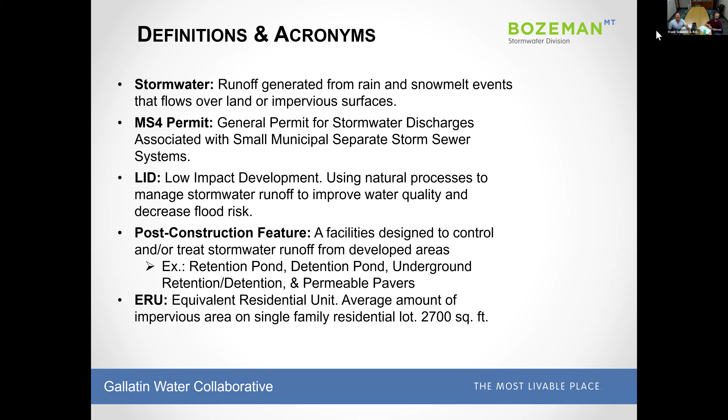So moving on, a little bit about stormwater here in Bozeman. This group, you've heard me say it many times: we discharge our stormwater directly into creeks and lakes and ponds around town. Stormwater's not going to a treatment plant before it discharges.

One of our big program drivers is we're here to improve waterway health. And we also need to protect public safety from flooding as well as from stormwater induced water quality events. That photo here really shows that. That's on Bozeman Creek, just after a little 1/10 of an inch rainstorm, so you can really see the plume discharging into the creek.

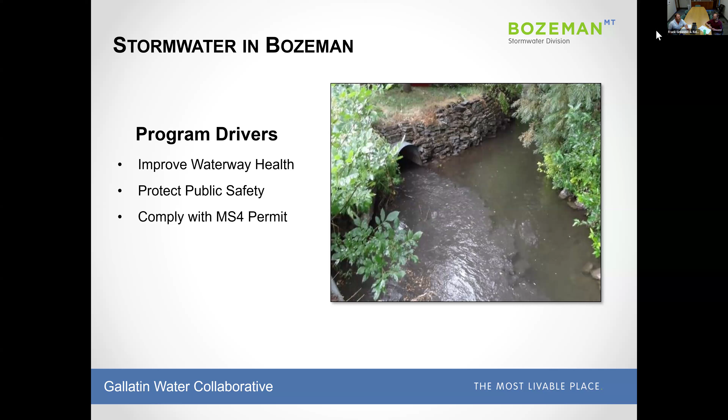Finally, we are required by law to comply with our stormwater MS4 discharge permit. In order to accomplish all these things, it does take money, so I will let Adam explain to you how we get our money and how we spend our money.

Thanks. So yeah, everybody is affected by stormwater. Rain hits everything, of course. We're all using the public streets, but then there are bigger contributors to runoff, hence the charge being based on the amount of impervious areas that you have.

So it's actually split into two charges. If you get a water bill, if you have a water meter in the city of Bozeman, you'll see this on your bill. There's a flat charge that everybody gets, just this one amount, $4.53 per meter. And then the variable charge is the one that's based on the amount of impervious area.

The next slide will show what it actually goes to, but the idea is that there are credits for properties that have stormwater features, post-construction features that Frank was talking about in the definition slide. Those actually qualify properties for a credit because they are already providing some storage and water quality treatment on their site before it ever gets to the city's stormwater system or to receiving waters. It's not that complicated of a calculation—it's basically a 45% credit on that variable charge is the way that it's set up right now.

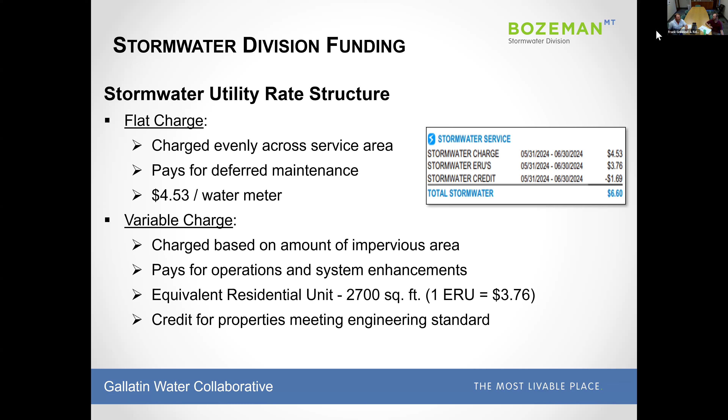So one single house, we don't try to nitpick whether you have a little bit bigger house or a little bit smaller house than somebody else. If you're a single family house, you just get billed one, and then everything larger than that is in multiples. So if you have a business with a really big parking lot, you might have 25 or 30 ERUs.

So what does that go towards? That's our sole source of funds is ratepayers.

That goes toward deferred maintenance, for instance fixing 130-year-old pipes. We've still got a lot of those left in the ground, and we're lucky to have gotten that long a lifespan out of them, so we need to start replacing them a little quicker. There are other system upgrades as well as cleaning and equipment to accomplish all that. That's around $650,000 a year.

Our utility operations, which is just keeping up with cleaning those catch basins and pipes, as well as the contracted services we need to make the bills go out and the lights stay on, and pencils and boring administrative things, but they all add up, and those are around $800,000 a year.

And then approximately $250,000 per year, although this one really varies a lot by what project we might have approved that year, are system enhancements such as flood control and water quality improvement projects. I would say we're actually probably a little higher than that right now. I think what we've picked up through growth and inflation over the last couple of years has probably gone more into that category.

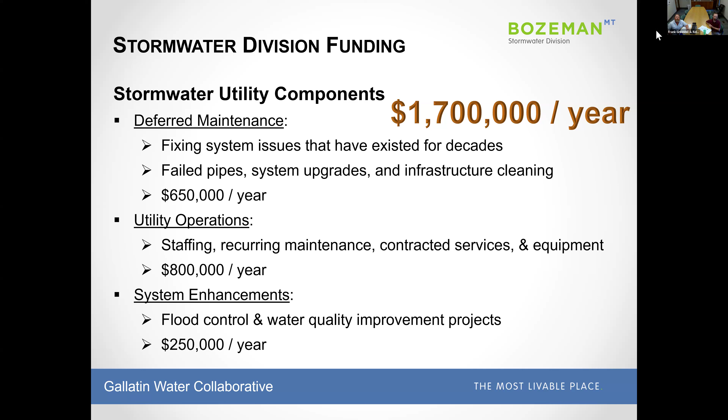So I guess, 1.7 million as far as utility goes, isn't that much money, but it's still a big chunk of change. And we need to spend that money as efficiently as possible.

Since 2008, the division has been operating under a 2008 stormwater facilities plan. That plan primarily addressed, or the main thing out of that 2008 plan was, you guys need to develop and implement a stormwater program. And we've done that now. We've got a program. We've accomplished a lot of the actual individual projects that were included in that plan. So that 2008 facilities plan has run its course for the most part.

So we are now working on this 2025 plan. The goals of that plan are really, a big one is to update our post-construction policies.

We're hoping to get out of this a big menu of capital improvement investments. And with that big menu of projects that we can do, be it pipe projects or water quality or hybrid type projects, we'll be able to better collaborate with other city projects. So other cities will know our long-term plan, and if they're going to reconstruct a street somewhere in like 8 years, we can better align stormwater needs with street reconstruction projects or a water main replacement.

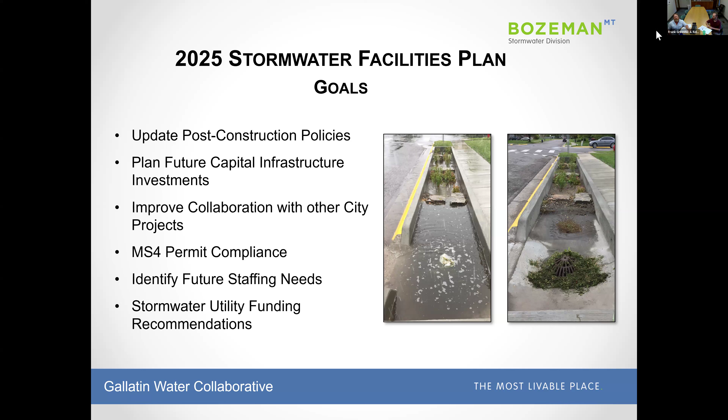So really one of the ways to accomplish the goals of this facilities plan, one of the first ones too is, we want to align with currently adopted plans here in the city. That consistency is very important to us. And to start, 2 of the main plans are the Bozeman Community Plan, as well as the Climate Action Plan. And I believe this group is pretty familiar with those.

I believe there were probably formal comments, I know for at least the Climate Action Plan submitted by this group, but in both those plans, resiliency is a major theme. So those plans each have, I'll just take the community plan, for example.

R1 is pretty much a goal in the plan to continue to strengthen and develop resilience. And in that goal, there are specific action items called out that we would love input on, that could potentially be incorporated into the capital planning section of the stormwater facilities plan update.

So for a little bit of homework, to make a strong way to provide comment on this plan, it's good to base input on these already established plans. So maybe some homework for the group is going through these plans - what do you like about them as it relates to the stormwater facilities plan update? That's a great basis for public input.

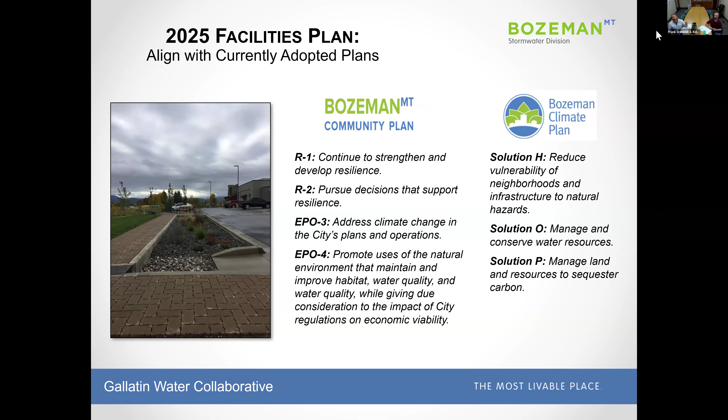So the Bozeman Community Plan and Bozeman Climate Plan are 2 plans good to be familiar with when thinking about providing input. A couple other ones would be the Bozeman Creek Enhancement Plan - looking at this one, we've accomplished a lot in here - and then the Parks, Recreation, and Active Transportation Plan.

There might be some other plans that could be germane to this, but these are the 4 that really stuck out to me. So again, researching these plans, and if anybody has trouble finding them, feel free to shoot me an email and I can dig them up for you and send them to you.

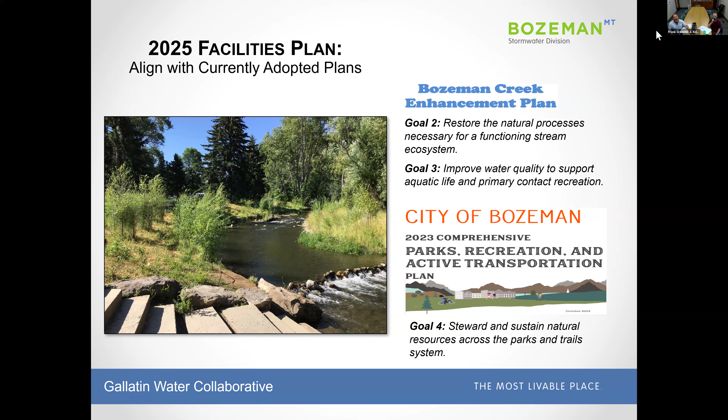Resiliency is kind of a theme in these 2, but not near as much as the first 2 plans. But really the Bozeman Creek Plan - improve water quality and support aquatic life and primary contact recreation - that's a really big one for us, and we're doing that every day. So aligning with currently adopted plans is a big thing we're trying to accomplish with our facilities plan update.

Some work that we have already done on this facilities plan update is - for our post-construction program, again, post-construction is how we're managing stormwater runoff from these developed areas.

So we have interviewed other cities - Kalispell for one, Kirkland Washington, I think Redmond Oregon, Bend Oregon - and we interviewed them on a suite of things, from policy to division structure, just about their programs as a whole, to figure out what other programs are doing.

Programs that are more advanced than us that have worked through this post-construction portion of stormwater already. Our consultant DOWL also reviewed our current post-construction program by looking at our existing policies, ordinances, some of our inspection documents, etc., just to see what we're currently doing and what we're currently not doing. And DOWL also went out and did a condition assessment of a subset of our existing post-construction facilities in town.

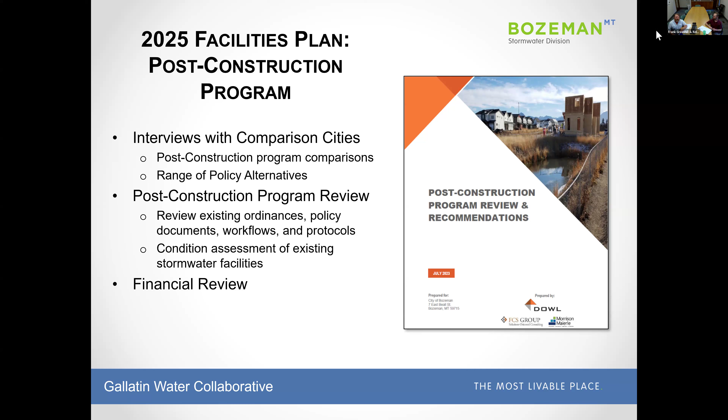So finally, they did a financial review of our program, and to get caught up on the maintenance - just to get our post-construction facilities up to an as-designed, functioning level - we're looking at about an $18 million maintenance bill. That's just to get caught up. So not a small task ahead.

They gave us a little summary from it. We do have clear inspection and maintenance policy. Our design criteria for these is currently getting updated in our design standards updates. So the design of facilities - the sizing, the volume requirements - all that is not being addressed here. None of the engineering portion is being addressed in this. That's all in our engineering design standards update, which is open for formal public comment for about another week.

The big one they're telling us is our current inspection program is lacking because, like Lily pointed out, there are so many of these. We are currently inspecting about 100 - the city owns about 100 of them. The privately owned ones are over 1,000, and we think that there's probably 600 unknown ones as well.

And they're probably all private, yeah, and we just don't have modern records on them. So anywhere from 1,000 to 1,600 privately owned facilities are not being inspected and maintained, or at least a good portion of those.

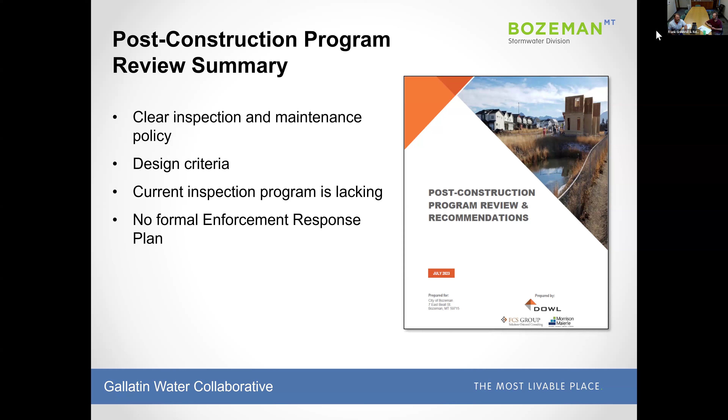Finally, one of the big ones from the summary is we do not have a formal enforcement response plan. We knew that going into this, not only because we knew it, but DEQ told us that in a violation letter we received from them, and our consultant told us that too. This is a big piece where you guys can provide input on helping us develop that formal enforcement response plan. So that is one of the recommendations, we need a formal enforcement response plan.

The big recommendation out of this post-construction program review, though, is we should focus city efforts and city resources on inspecting only the city-owned facilities. Trying to do all the other ones would be too much for us. That's just a recommendation, and so helping us develop a program for getting those privately owned facilities inspected and maintained.

How we do that, Adam, you could provide some insight on that maybe for what you heard from the post-construction interviews. Would you want to go into that? Yeah, I think maybe just a couple of examples of what's out there, what are possibilities.

There are these other cities, some have different geology and different layouts and different development patterns, but the themes were who's responsible for what and how do they have to be designed. We took their design feedback and that went into the engineering design standards process. But the ownership and maintenance piece was really interesting. Most of them had a similar layout to Bozeman, where certain features in the public right of way are maintained by the city, and if it's on a private lot, those owners maintain them.

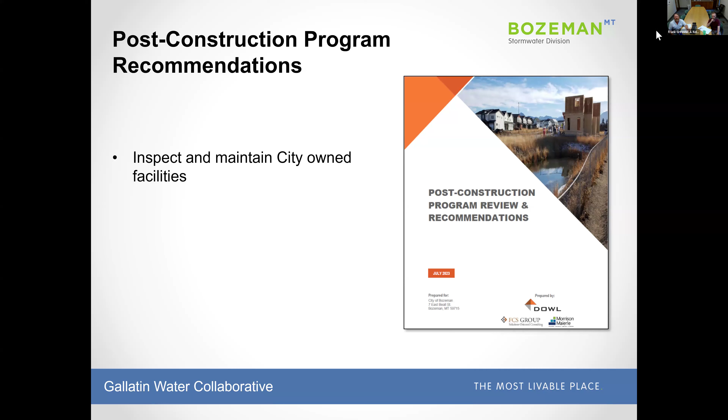And so, yeah, that's about it for post-construction. It's a really big part of the program. So just remaining work where we're really looking for input from all stakeholders involved in this, from everybody, is what kind of level of service does the public think we should be providing?

From one extreme, that could be the city takes over everything and is inspecting and maintaining all, let's say, 1,600 facilities a year, to the city just does the city-owned facilities. So establishing a level of service is a great spot to provide input, whether or not we need any code updates, and then really providing input to help us craft our enforcement response plan for facilities that are not getting maintained. And doing all that would really cover the inspection frequency as well as responsibility.

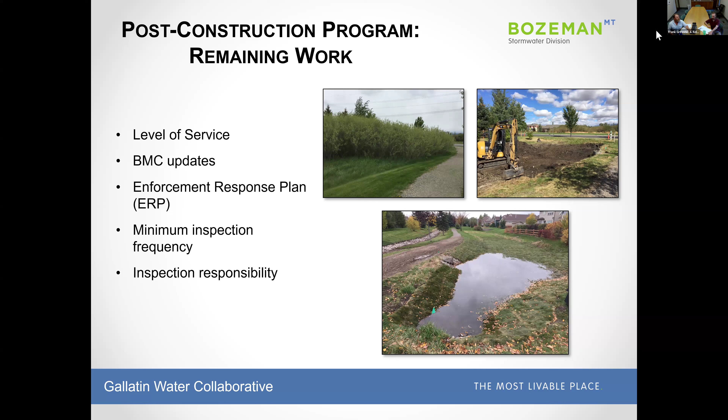So I think I've exhausted the post-construction portion. Now we can get into the really nerdy stuff of some other work we've done as far as data collection, analysis, and monitoring to inform the rest of the plan. And I will let Adam take over on this.

Yeah, so we looked back through the historic record. Our current ponds, any pond that was designed between 1980 and present day would have been built to capture the 10-year 2-hour storm. But it's been a while, and even that was based on data from the 50s, I believe.

So we grabbed all of the modern data from the airport and from MSU, and had to toss out a lot of data that either was incomplete or couldn't be relied on, or winter storms, if you're not really sure if they're ice or rain or what they are, you kind of have to toss those. But the good data that we had, we used to update all of those curves, and it turns out they're actually pretty close to when they did it before.

We don't have any statistics to show that it's changed significantly from there, but we know we fine-tuned these curves, and then we're able to plug this into a model so we can take the older parts of town that developed before 1980 and try to get them up toward that better level of service that we get in the newer parts of town. Next slide.

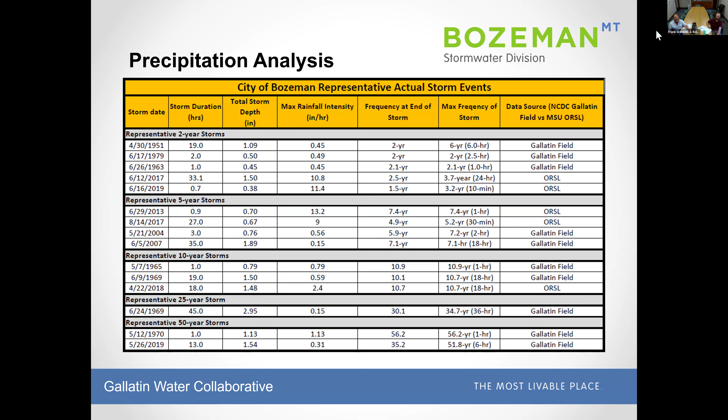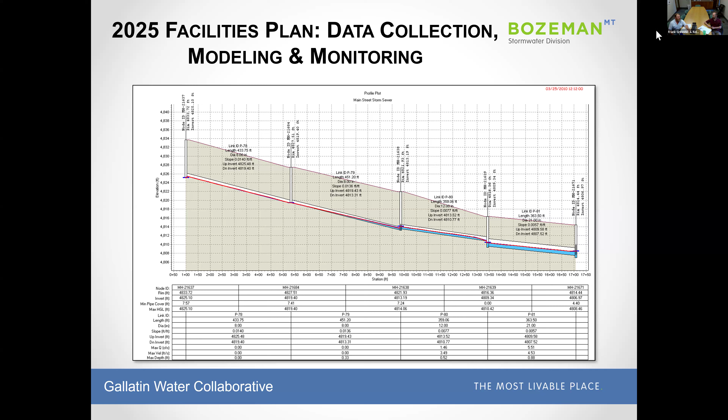I don't know exactly the size of the storm they ran in this model, but you can see that this pipe system is easily conveying whatever storm they modeled. One great thing about this modeling effort is it allows us to find bottlenecks in our system without waiting for the storm to show us. Instead of seeing a manhole floating three feet in the air, which happens a couple times a year, this model will help us know where to look for nuisance flooding as well as potential major flooding around town.

The modeling results aren't entirely finished. We'll talk about some capital projects in a minute, but the modeling is really what's going to inform what those capital projects are and where some of the highest priority areas are.

An additional project we did was to look at some open conveyances. I guess everyone here is probably familiar with the various types that might be called a creek, a ditch, a stream, or something else, or a combination. We weren't trying to get into what type of water is flowing, just to say where are a couple of these larger conveyances on the west side of town where we know we're growing, and do those have the potential to carry additional flow? Is that a resource for us, or a potential flood hazard in a couple of these locations? We didn't go greatly into depth, but now we at least have a baseline of one year's worth of flow monitoring in several of our largest conveyances out to the growth boundary.

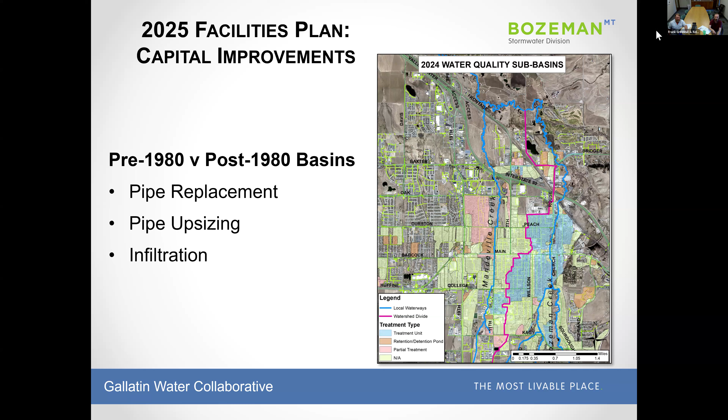There's also a couple different ways to do these projects sometimes. We try to work as efficiently as we can so we don't tear up the street, divert traffic, and then do another project on top of it a couple years later. We want to try to work as efficiently as we can.

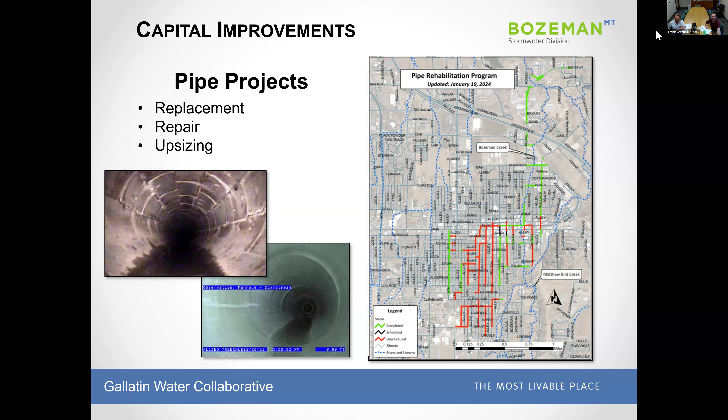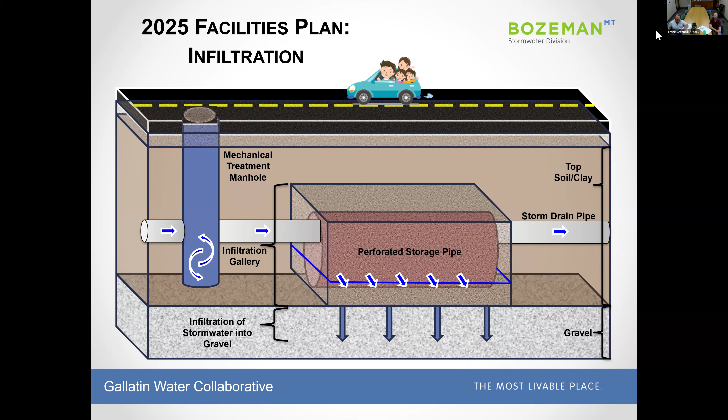Then the last remaining task is just to figure out how to staff and address growth over the next 20 years, because we have the same number of people this year that we had last year, but we have about 4% more city to take care of than a year ago. And it keeps happening every year. If we're barely able to keep up as it is now, we know we're just getting behind as the city grows. So there's overall looking at the needs, maintenance, rates, and projecting that out over the next 20 years.

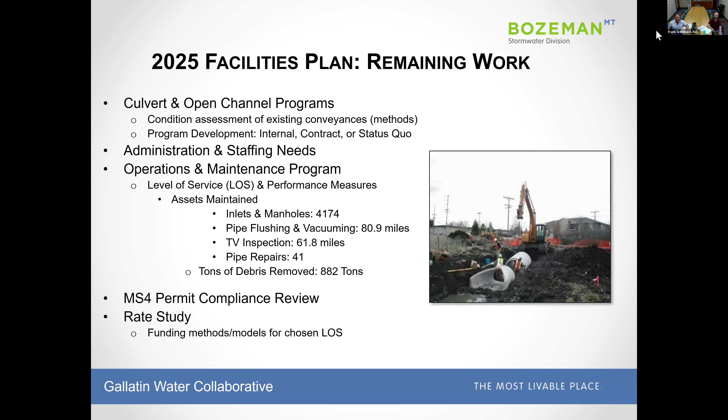So let's see, how do we do on time? We're just under 40 minutes, not too bad. But I think there's probably a lot of questions, and there's a lot more we could go into depth on any of these topics.

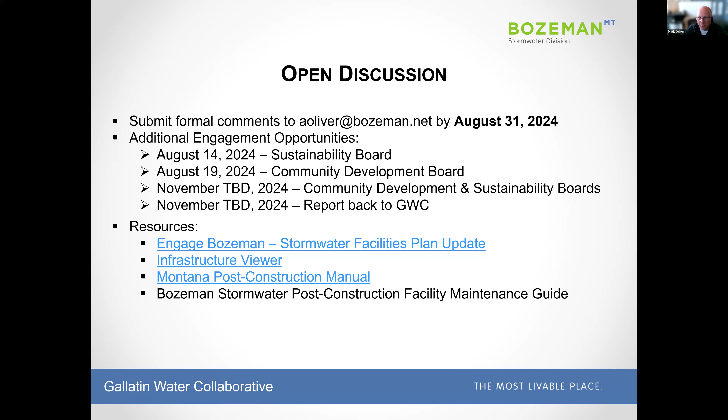But in looking around at some of the stuff that's been done here in Helena, where I'm located, we actually have a large wet detention basin out behind our building, and we refer to it affectionately as Lake Metcalf, named after the building. They've done a number of things with that where it looks—I'm not going to say it looks natural because it's a very large hole dug in the ground—but it has a considerable amount of vegetation in it, around it. They do definitely keep the inlet and outlet clear, but we have several others around town, some that are more detention ponds, that they've turned into kind of community parks, and have been pretty successful at kind of naturalizing some of those.

Another thing from just past experience a long time ago—I used to work with the feedlot permitting program. Something that some of the folks there experimented with was kind of the vegetated treatment swales, which can be really challenging, depending on how you do them and how much space you have and all of that. Getting the flow through right, and getting it so that they do settle out nutrients, or settle out nutrients and sediment. But often those two can be a bit of a community asset, in that they add some green space. They cut down on some of the latent heat that comes from a lot of the hard surfaces. And they provide some urban habitat for birds and plants and things of that sort.